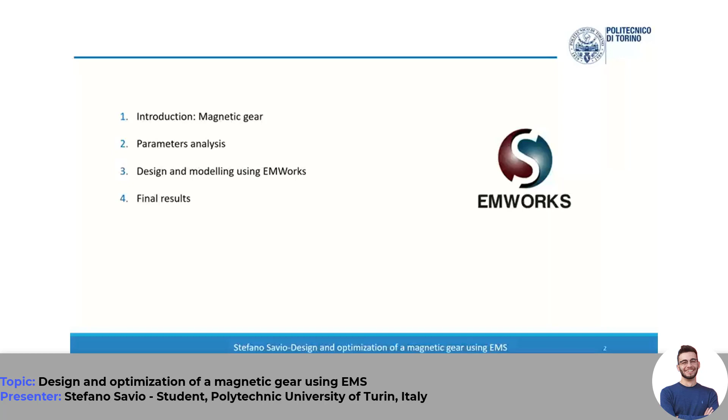I'm going to start with a brief introduction about what a magnetic gear is. I think that many of you know exactly what it is, but I will introduce you to the most important things. Then I will analyze the parameters that we need to take care of when we design a magnetic gear. And in the end, we're going to see how to design and model it using SolidWorks and EMWorks, and then we're going to see the final results of my work.

First of all, what is a magnetic gear? Using simple words, it works exactly like a mechanical gear. The main difference is just that all the components that constitute it don't interface with each other by contact, but just with electromagnetic fields. So this is an interesting point, because it lets us reduce the losses a lot. The components will have a longer life, for example, and of course we will have in general a higher efficiency compared with the mechanical gear.

Another interesting point of the magnetic gear compared to the mechanical gear is that they need low maintenance. For example, they don't need oil, and there are no parts that contact each other. So it can be used, for example, in situations where you may have a lot of difficulty putting hands on to eliminate some problems or fix something.

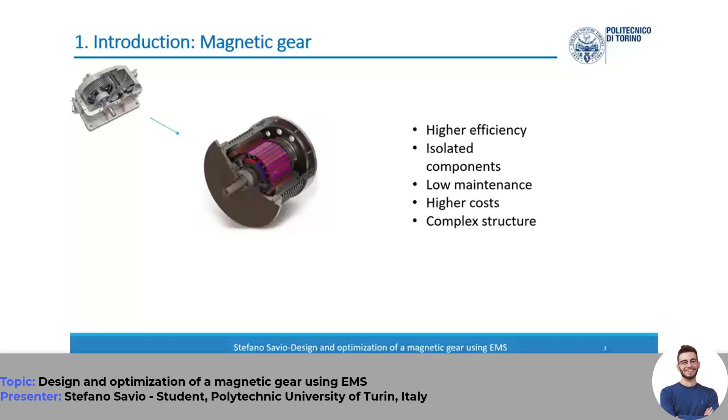And in the end, it presents a more complex structure with respect to a mechanical gear, because it's true that the components don't touch each other, but we need to keep them extremely close, because we need to let the different electromagnetic fields interact with each other. So they need to be extremely close, but not touch. So it's a little bit difficult in the end to create this structure without any problem.

So a magnetic gear is made of 3 different parts. An outer rotor, which we can also call a low-speed rotor, consisting of the external metal housing and pairs of magnets. In my case study, I've used 15 pairs of magnets. And the second important part is, of course, the inner rotor, or the high-speed rotor, consisting of an internal metal housing, different from the low-speed rotor, and 2 pairs of magnets.

Between the outer rotor and the inner rotor, there is the metal gearbox. The metal gearbox is, of course, made of metal, as its name says, and is made of N pole pieces. This part of the magnetic gear is extremely important, because it interconnects the different electromagnetic fields generated by the inner rotor and the outer rotor to mesh between them and let the outer rotor generate torque. So it's an extremely important part of the magnetic gear.

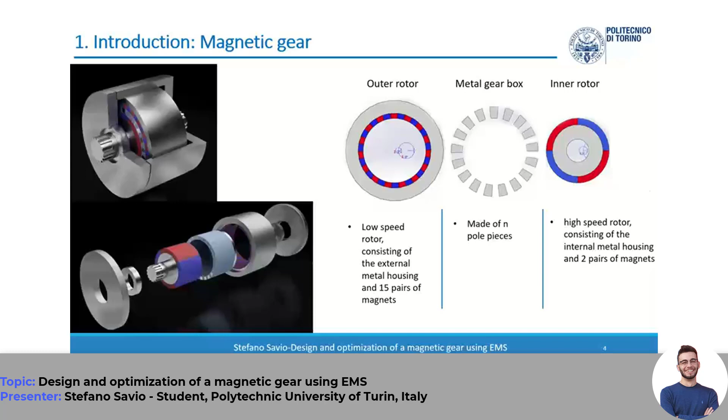Okay, talking about the parameters analysis, we need to take care of different things. First of all, the metal gearbox radius. As I told you, it's an important part of our gearbox, and as we can see in the graphs, increasing the metal gearbox radius and also the thickness of the magnets, for example, the torque increases a lot.

There's just one point that we need to take care of: more magnets or bigger magnets are of course useful and better for torque transmission, but they increase, of course, the costs, and we can't always have the availability to create exactly what we want. So we need to make a decision between the dimension of magnets and the metal gearbox in order to achieve a good torque with reasonable cost.

Another thing extremely important to take care of, that we're gonna see in practice later, is the dimension of the air gap between components, because as we can see in the graph in the lower right part of the slide, even a minimum increase of the air gap causes a great loss of torque. So it's extremely important to define it correctly and create a structure of our magnetic gear that is able to keep the air gap constant.

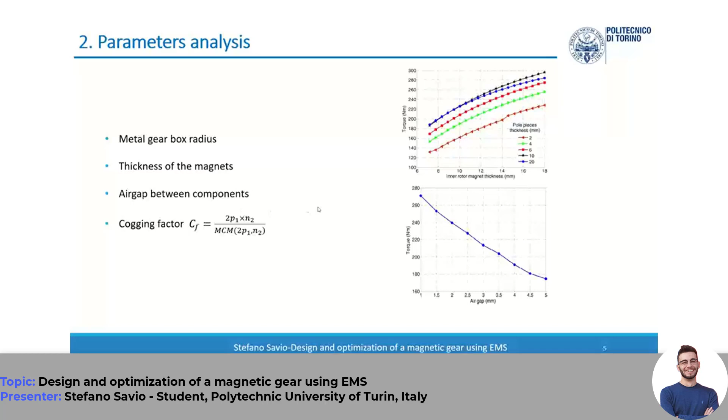And in the end, an important factor that we need to control when we design our magnetic gear is the cogging factor. This factor, as you can see in the formula, depends on the pole pairs of the gearbox and on the number of magnets. So if this factor is less than or equal to 1, everything is probably working correctly, in theory almost. But if this factor is bigger than 1, probably we will have a lot of oscillations in transmitting the torque between the inner and outer rotor, and this can create a lot of problems, especially structural problems.

Then we can start the design and the modeling using our software. So first of all, we need to choose a goal. In my project, I chose to obtain a gear ratio of 7.5. We call it gear ratio as we do in the mechanical gearbox, just because the principle is the same.

We can make a demonstration. I don't have it with me, but it exists, that the Willis formulas can be applied also to the electromagnetic gearbox. So it's not a problem to define it as a gear ratio. So after we have defined the gear ratio, the number of magnets of the inner and the outer rotor, and the number of pole pairs on the mechanical gearbox, we can control the cogging factor, and then we can start our simulation on EMWorks and SolidWorks.

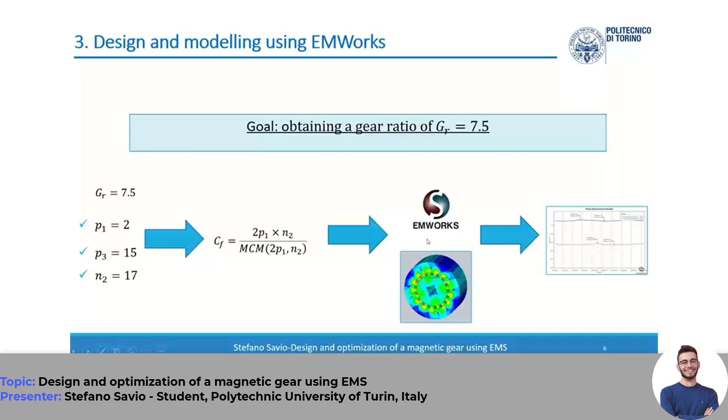In order to do that, we defined 3 different components on SolidWorks, which are the high-speed rotor, the low-speed rotor, and the modulator, which is the mechanical gearbox. In the end, after some work on it, I discovered that EMWorks wasn't able to analyze my model correctly. So using the service that you provided to me, I discovered that I needed to create also an airbox, because EMWorks didn't recognize what was present between the different components.

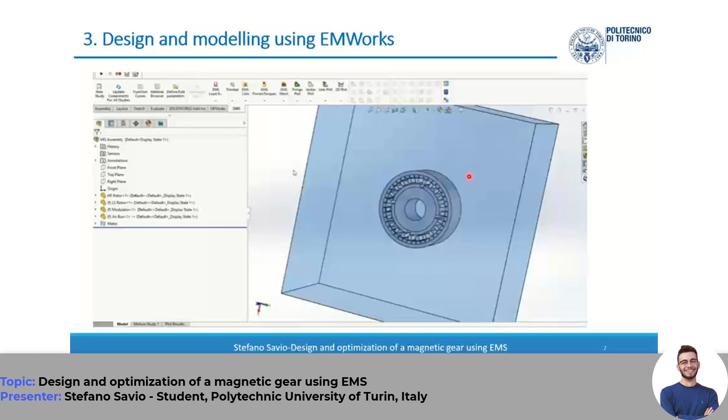So we need to define another block, this one in blue, that lets us define it as air. So it was an important point. After that, we can start a new study using the EMWorks suite.

Of course, we need to select the analysis type magnetostatics and also check the parameterization option, because our study will be possible with, I don't know how to say. We parameterize one thing, that is the angle of the inner rotor, in order to simulate the movement of the inner rotor. So we can see how the magnetic fields of the inner rotor and the outer rotor interact with each other.

So after we made the parameterization, we can define the different materials of the components. EMWorks has a great library of materials, so I didn't need to add the different materials. Everything was ready to be used. And after defining the materials, we also needed to define the direction of the magnets, of course, because if we didn't define it correctly, our model would probably never work. So for the coercivity direction, we set it to cylindrical, and everything works fine.

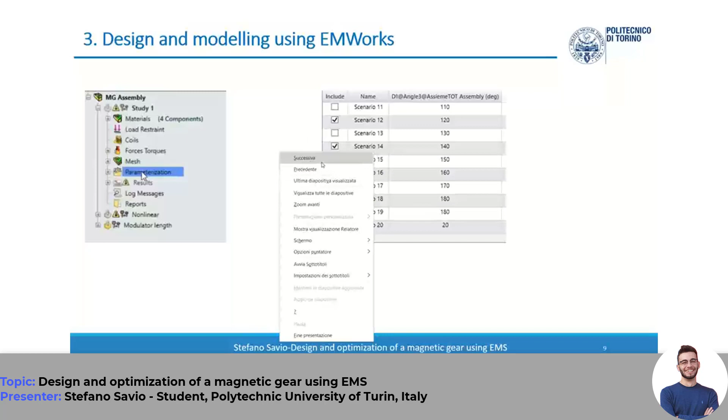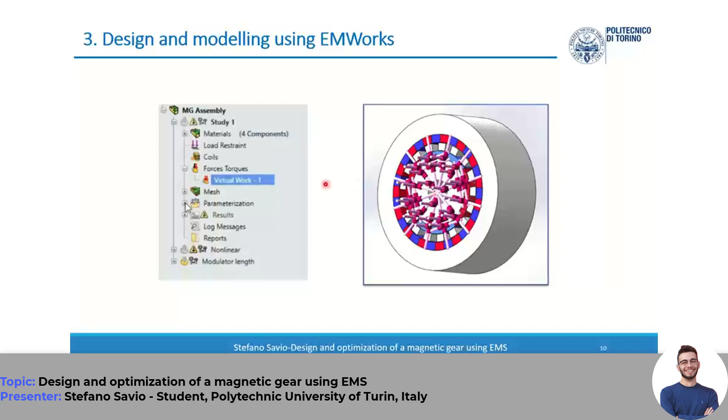After that, we started the parameterization, and as I told you, we chose the angle of the inner rotor in order to see, for the different positions of the rotor, how the field will interact. And then, last but not least, we defined the force torques, or the virtual work. This is the most important thing of our simulation, because it makes clear to us, when we create a simulation, whether our model is working correctly. So with this, we can also create some real simulations, some videos that I will show you later.

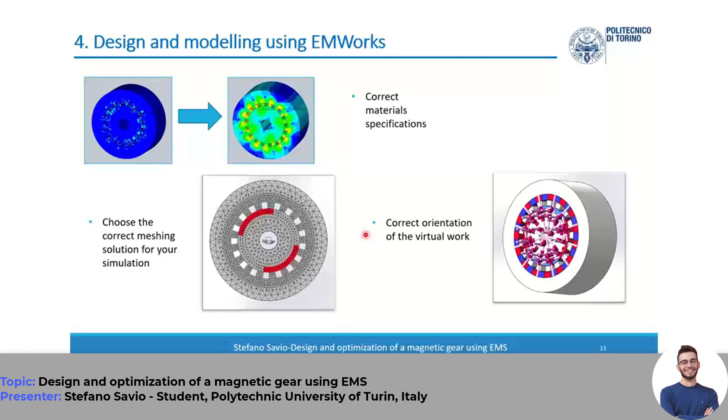Then another important point is, of course, to choose the correct meshing solution for your simulation, because EMWorks provides a lot of meshing solutions, some more simple, some more complex, and of course you need to choose it according to your model. And another important thing is the correct orientation of the virtual work. If you put it wrong, you're gonna see nothing on your screen.

Now, these are some videos, if I'm able to. Okay. In the end, you can see your simulation working, and I think that this is the most interesting part, because as we can see, there is a specific angle for which the magnetic field interaction between the inner and the outer rotor is maximum, and it is when you can see the red point on the magnetic gearbox. This is another simulation.

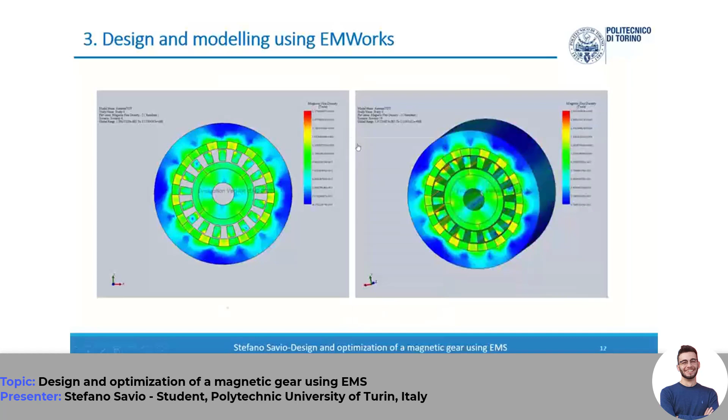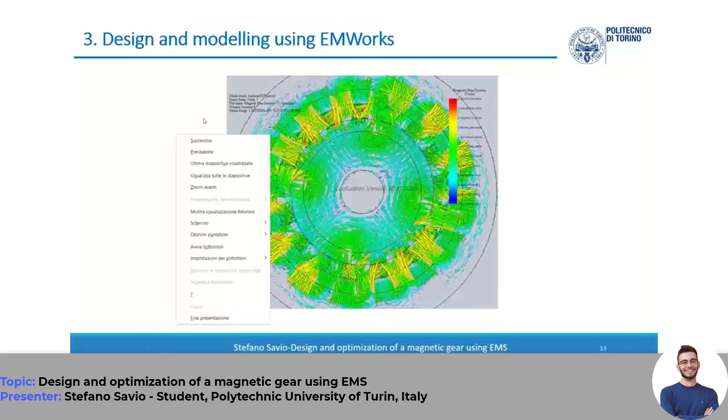Okay. You can also show the simulation with a vectorial aspect, and this could be useful. Maybe not this one, because there are a lot of vectors, but just to let you know, it could be useful because there you can see exactly where the electromagnetic fields are going in your simulation. In the end, we obtained some final results.

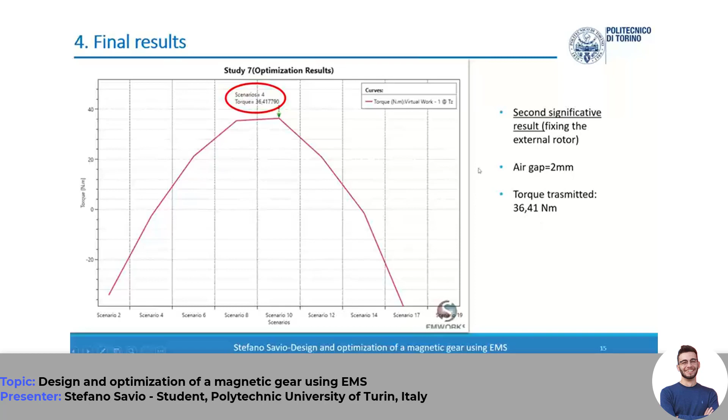This is the first significant result that I obtained, fixing the external rotor. For this first result, I fixed an air gap of 4 millimeters, and the torque transmitted was about 24 Newton meters. And as a first result, I was not very happy about it because, from a theoretical point of view, this torque was extremely low. So knowing that the air gap is extremely important, I reduced it to 2 millimeters, and I obtained a transmitted torque of 36 Newton meters, which is much better than before.

In the end, we can see what's happening on the internal rotor and on the outer rotor, of course always in EMWorks. And as we can observe, on the internal rotor there are a lot of oscillations, which are the green and the red lines. Then on the external rotor, we have a practically negligible oscillation effect and a great transmitted torque.

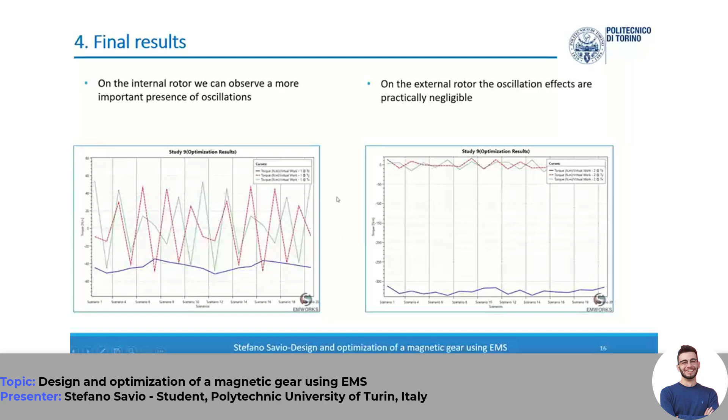In order to see if we have done a correct dimensioning of our model, we can compare the results with the theoretical formula. And as you can see, as the internal rotor produced a 43 Newton meter torque, the external rotor sees a 325 Newton meter torque. We obtained that our choices of air gap, pole pairs, and pole pieces are correct. In fact, the gear ratio is very similar to the theoretical one. We chose a 7.5 gear ratio, and we obtained a 7.5 result. So I think that is an interesting and successful result.